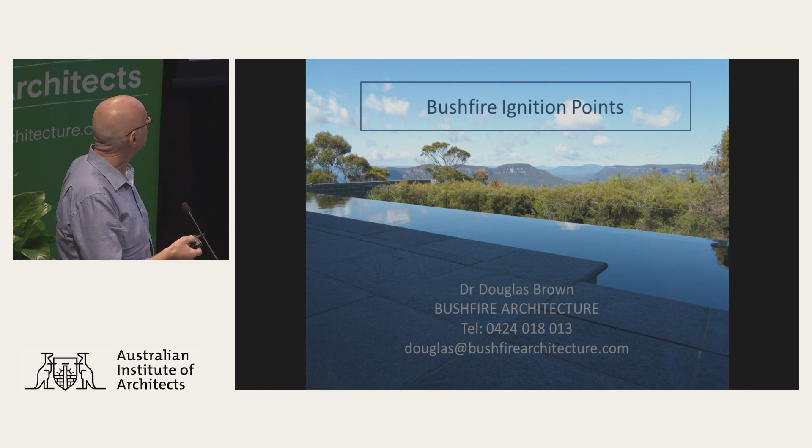Let's start with a bit of quick revision about the conditions necessary for a bushfire: high temperature, low humidity, high wind speed, high fuel load, and then ignition. If you don't have ignition, you don't have a bushfire. If you don't have high wind speeds, you simply have another hot, dry day. It's when you have a hot, dry day with high wind speeds and ignition that we have a bushfire. That's the difficulty of this space, because you can have so many days where the conditions are right, but we don't have ignition.

Now, bushfire research has followed approximately 70 years of research. After major bushfires, there are post-burn evaluations, and as part of those, you look at the damage to structures. Over that period, we've found out which are the weak parts of a building that repeatedly occur. We've had some false alarms — one, which was amusing for a decade, was that if a structure is white, it will not be attacked by a bushfire, because white reflects heat. That one did in fact last for 10 years, but we've got 22 really good outcomes in terms of identifying the repeated weak parts of a structure, which we refer to as building ignition points.

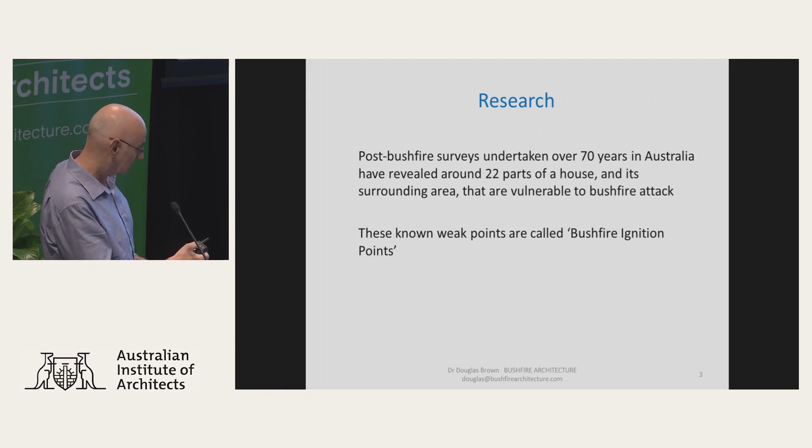So let's have a look at bushfire research. This research has been done by the scientific community, and essentially they've identified the weak points, and we're going to change the construction of buildings and strengthen those weak points so the building as a whole has a greater ability to withstand a bushfire. But architects and our profession have not been absent in this field, though our methodology is different. What the scientific community does is a study, then a scientific paper looking at the results from the bushfire evaluation, and compares those with previous evaluations. That's not the methodology we use in architecture, unfortunately.

But we have done a few things. After the Ash Wednesday bushfires, Boral had a competition — because the fires affected Victoria and also South Australia, they had a $10,000 prize to come up with designs. Then after the 2009 Black Saturday fires, our own institute, the Victorian chapter, in association with the Victorian government, came up with a competition, but you only had about 2 months to come up with a design and there was no prize. That's a very unfair expectation to ask of architects. There are a couple of other articles architects have produced, but generally we have some really creative architects who come up with innovations that aren't necessarily published, so we need to find a way to pull that information together.

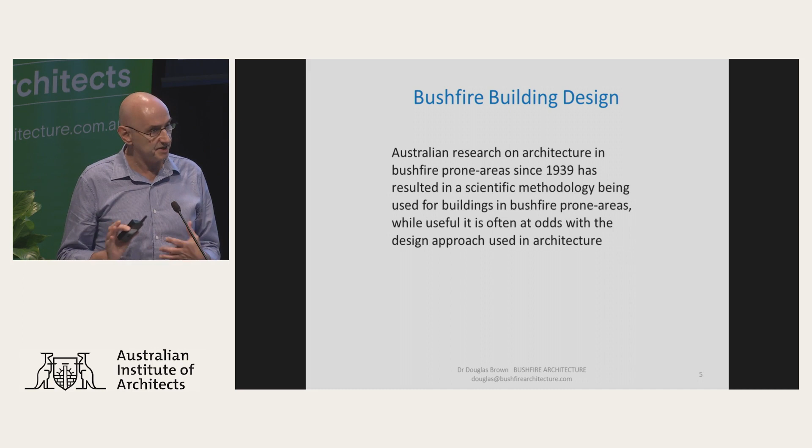So we focused on the scientific methodology, and sometimes that's at odds with design — design is expressed differently to the way we reflect science. I'm going to make a bit of a controversial statement here, which is that most construction materials can be used in bushfire-prone areas, but we have to differentiate between those materials, whether they're used externally or internally. Let me give you an example. I'm going to pick one building material and talk about that in greater depth, and that one's timber. So let's have a look at timber.

8 to 9 of the 22 building ignition points result from the use of timber. You can see what they are here. Timber window and door frames and timber doors are actually part of the structure of the building, but then we have these other components which are either right next to the building or close to it, and all of them create damage.

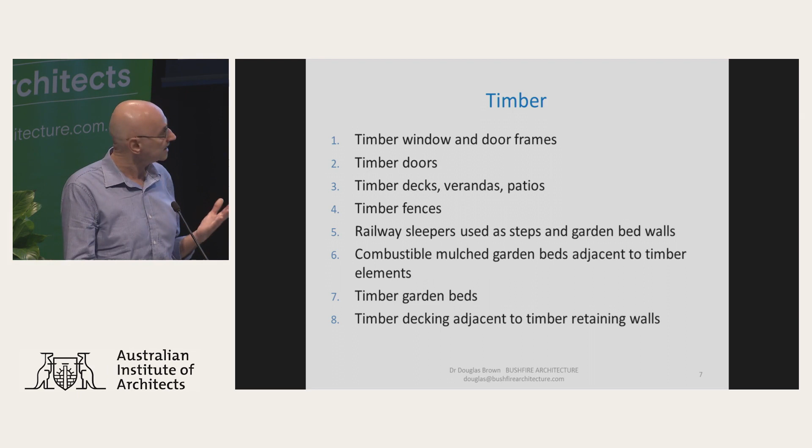We can look at a low maintenance alternative. That goes back to what I said before - if we're designing a structure for 50 years in a bushfire-prone area, we will try to look at low maintenance materials.

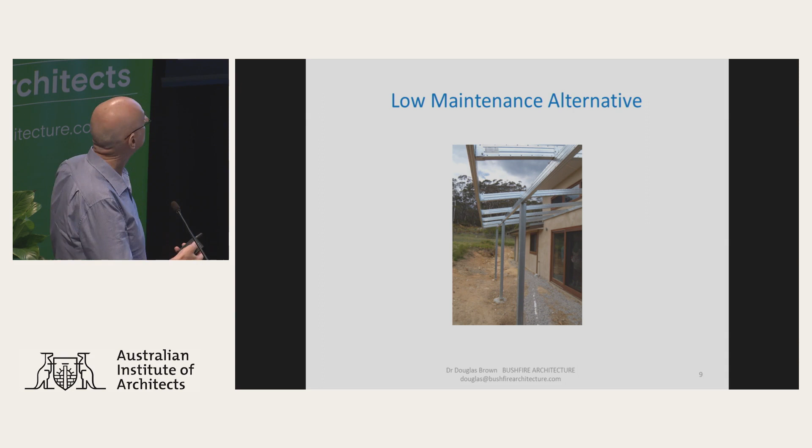Now, some of the structures you'll be redesigning - those people have not just lost their homes, they've lost the contents of their homes. So what you can do now is build in furniture. You can have built-ins, and that way you're using timber while also saving them from having to purchase internal furnishings. The use of built-ins is really useful in terms of creating space.

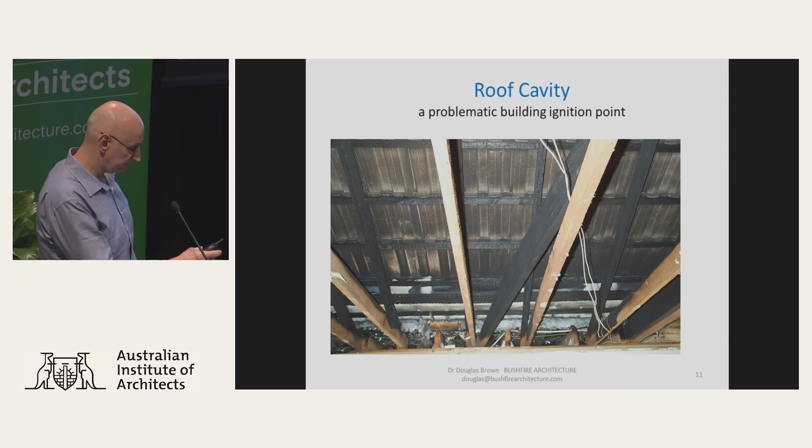Let's have a look at the roof cavity. The roof cavity is one of the most problematic bushfire ignition points, for two main reasons. It's difficult to extinguish - if it's a double-storey structure, you have to get the fire hose into the roof cavity, and it normally doesn't have a window, so it's difficult to actually get the hose in there to put the fire out. Also, when you extinguish the flames, you damage your structure, the electrics, the plasterwork, the furniture. That's counterproductive - you're trying to put out fire, but damaging the structure at the same time.

So let's look at some things we can do. One would be to extend the eaves and collect the rainwater at ground level. Another would be a hybrid solution where you still extend the eaves, but might have gutters on a couple of the elevations directly attached to water tanks. Another option is to have all components constructed of metal.

And finally, the one I'm kind of thinking about now - the big danger of embers getting into the roof cavity is that if residents are taking refuge in a particular part of the house, that part becomes vulnerable if the roof cavity goes up, because embers can spread right throughout the whole house, and the whole structure is potentially compromised. Initially smoke would affect those people in the room, coming through the gap between the ceiling and the roof - potentially toxic smoke - and then later it would develop into flame.

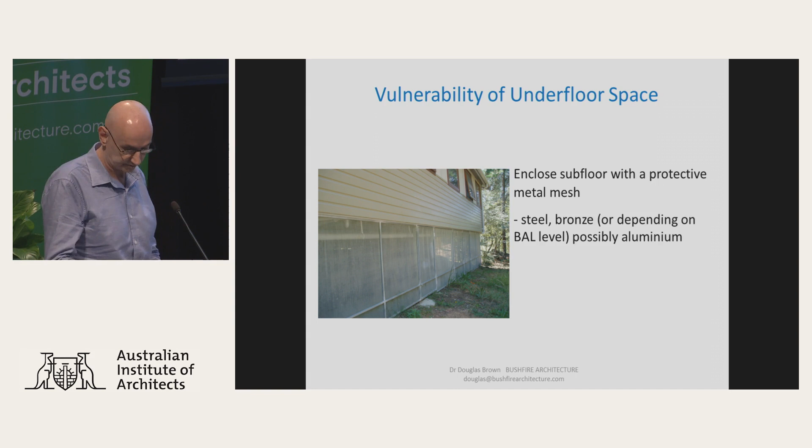Glazing is a big one. I talked earlier about the fact that high wind speeds will really impact upon a large expanse of glass, but so does radiant heat. Radiant heat will cause the glass to crack, and then the high wind speeds will push it in. Sometimes the glass will explode because of both of those combined factors.

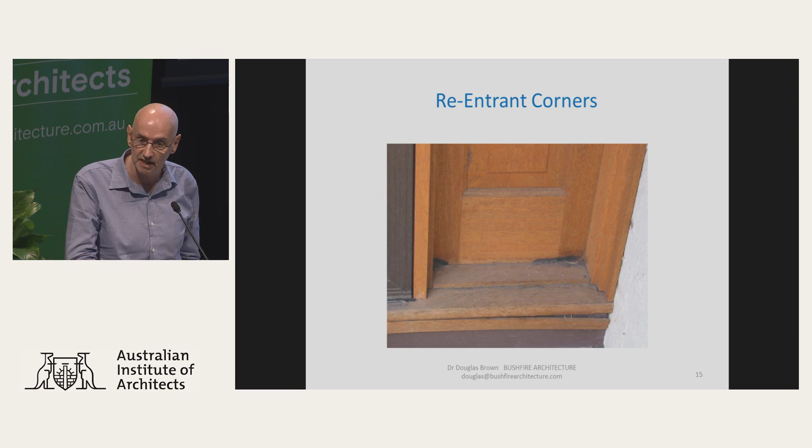Re-entrant corners: what happens is you've got high wind speeds and they will push these small embers collectively into an area. Here you can see where they've been extinguished, but if those ember piles in the corners hadn't been extinguished, they would have flared up and that door would have gone. So re-entrant corners are really important. We need to look at structures which have a simple design and don't have re-entrant corners.

It's not just the house, it's the area around it. Timber fencing and timber retaining walls are also building ignition points. What happens with an older paling fence is it catches alight and it takes a fire right up to the house. And you can see here, we've got retaining walls - what happens with those is they catch alight as well, and depending on how close they are to the house, they can impact on it too.

I've been looking at some of the rebuilding which has been happening in Paradise, California from their fires of 2018, and the first houses have been done, and obviously the cost is more. I read about one family who said, yeah, we built the house to code, but we've got a dog, so we had to put a fence up pretty quickly - a wooden fence all the way around to make sure the dog doesn't get out. So they've actually endangered their house by having that timber fence. Cost is just so important, and the landscaping is so important too.

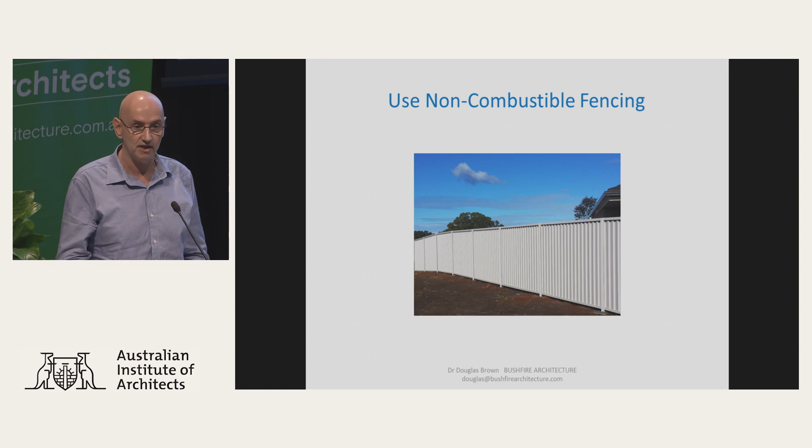So we use a non-combustible fence. You can also get slimline fences that store water, which can potentially be used as bushfire defence as well.

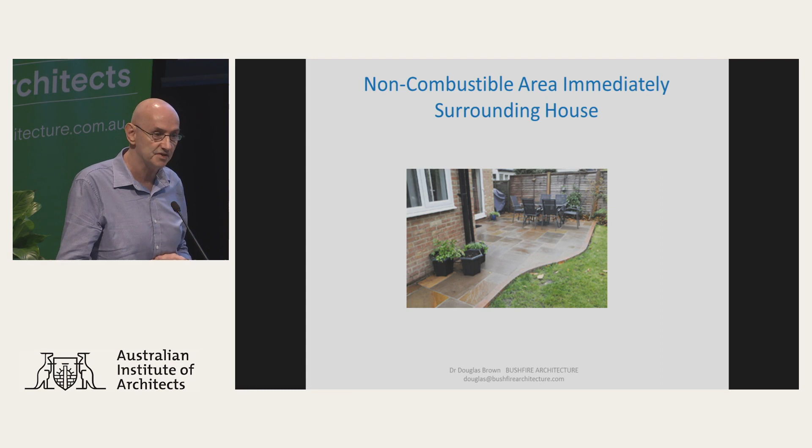I think it's really important to have a non-combustible area around the house. So the idea of having garden beds next to the house has gone - we don't do that anymore. We try to have a non-combustible area so that when embers collect around our house, they're not going to cause it to go up. What they've done here, for example, is use pot plants, which are small - not high dense, not dense plants, maybe just perennials. The other good thing about having this non-combustible area is that when you want to clear out your gutters, you can put the ladder onto a solid surface.

Avoid lightweight second-story extensions. Just avoid them, because unfortunately they're very susceptible to flame. And they often have large amounts of glazing, which is to capture the views, but it does put the house at risk.

Corey mentioned earlier about building-to-building ignition. This is a real issue. Unfortunately, we all want that ocean view or those vistas, and it's at the bottom part of our block that allows us to do that. So everybody builds down there, and when one house goes up, it impacts the others. This was Tathra. We're doing more research about the effect of building-to-building ignition and how we can possibly resite our buildings to minimise that effect.

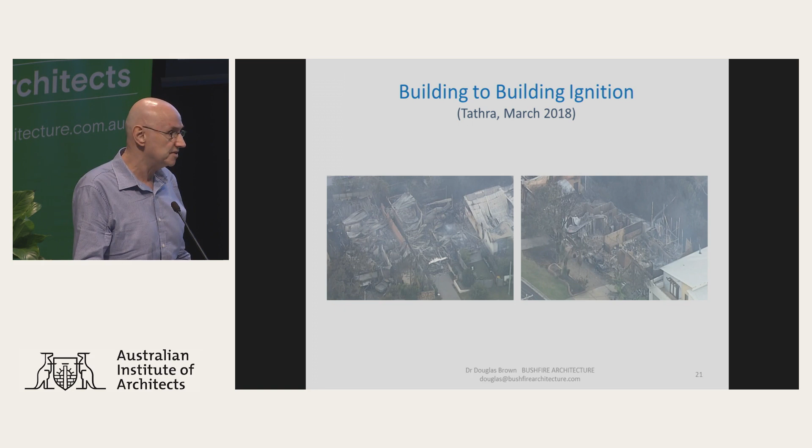One thing we have to do is change our client perceptions. You'll be dealing with clients who are stressed, but it's important to say we need to start thinking differently about how we rebuild in bushfire-prone areas. So rather than focusing on the views and the vistas, you might have to say: the view and the vista is there, you just have to walk out the door and walk maybe 5 metres. So you've got a big task to get them to change their mindset on that.

We have become lazy. We want massive amounts of glazing. We want everything at our footsteps. We just want to walk out of bed in the morning and see this glorious vista. But it comes at a cost in bushfire-prone areas, and that cost can be death. It can be life.

This is probably more the future of what we're going to go for, and it's going to be a bit of a hard sell because people want double stories. But we have become a bit greedy in terms of what we want. So if you're going to reduce cost, you're also probably going to reduce the size of the structure you build.

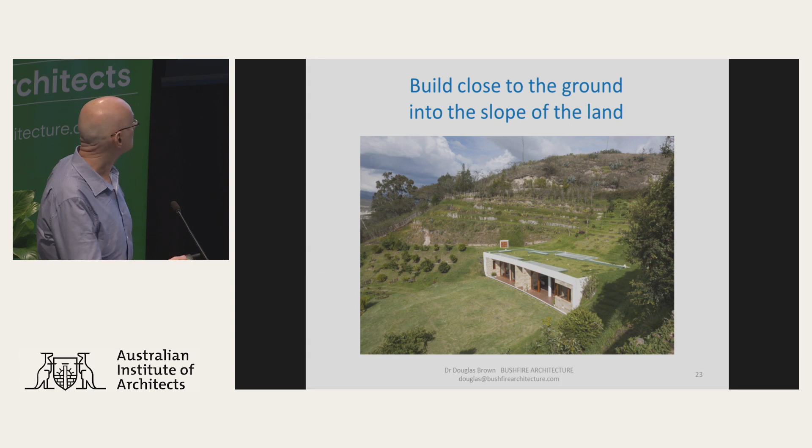So how do we reduce the cost and create more internal space? This is an area where you will really excel, because so far the research has been done on construction materials. It hasn't looked at design. This is where you as architects will really shine, and this is where we need you to step up.

These are just some very basic examples. You're likely to have a smaller floor plan because things are going to cost more. So now we have to make better use of that floor plan, and we do that through good design.

We will use built-ins far more than we have before, because they create internal space. We will use less glazing. We'll still have windows, but you might have to go on site, get a step ladder, step up and say the best vista I can get is 2 metres up, looking at that valley over there, and I'm going to design that window into my structure. So it's windows to capture vistas, to draw your eye out of the smaller space and create the illusion of a larger internal space.

We've become obsessed with black framed windows in this country, and we need to let that go, because unfortunately what a black frame does is stop that transition from inside to outside. I'm sure you all know this, but just in case you don't: your eye looks at the window, sees the frame, pauses, and then goes through. If you've got a light-coloured frame, your eye is drawn straight outside. It's that beautiful, lovely transition, and that's what we'll use to create the illusion of more space when we've got less space.

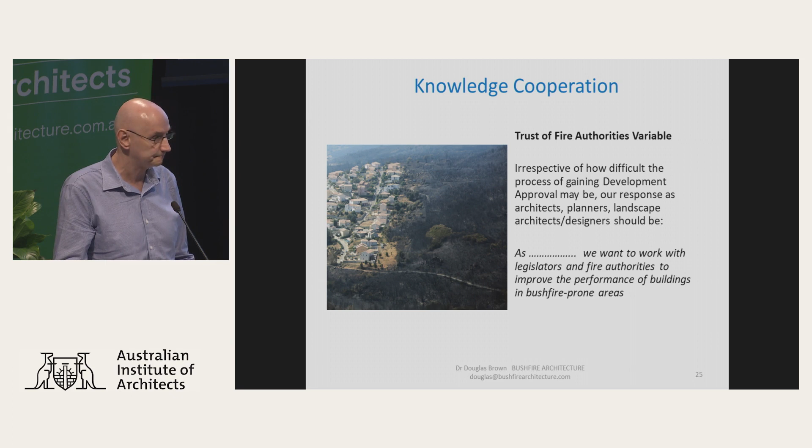Thanks, Douglas, no stranger to a bit of controversy there. And you're going to see it in the next little session. What we have is 6 architects to step up and show their work, or discuss the work of architects. They range from young to old, and we thought we'd put one of the more interesting ones on first.

A young chap called Rory Betts-McRae. Where are you, Rory? Where have you gone? Thank you. Rory's a master's student from the Architecture School at the University of Newcastle, and his family commissioned a house that was designed by Fergus Scott, as I understand it, in a flame zone situation. So Rory's going to talk a little bit - it's probably his first public talk as an architect. Treat him kindly.

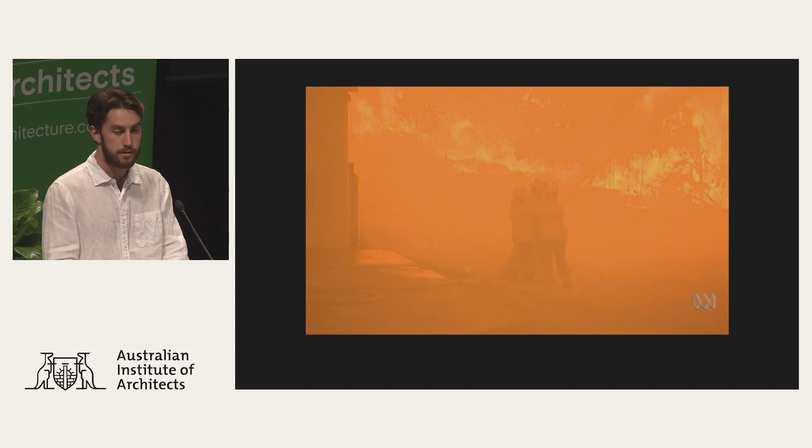Just after 3 p.m. on Thursday the 5th of December, our next door neighbour called. We could hear the fear in her voice. The Currowan fire, which had encircled our villages of Bawley Point and Kioloa, had just crossed and cut off the road access in and out for several days, had just jumped Lake Willinga and was heading towards our properties. It was reported that the flames were 30 metres high and we were in the direct line of the fire.

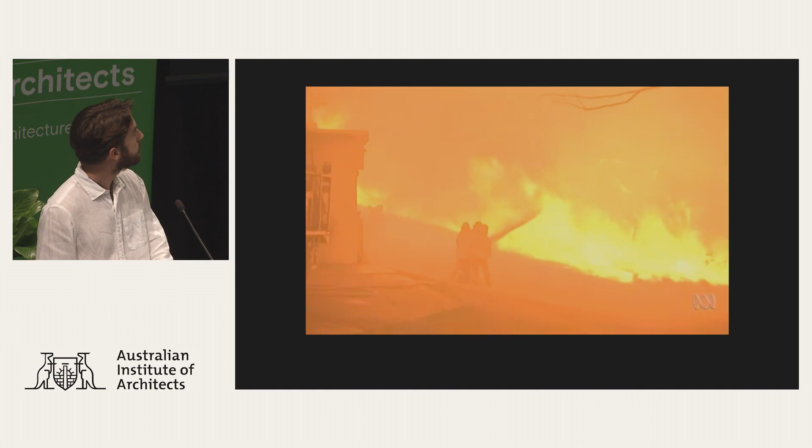8 minutes later, this is what arrived. The footage was shot from the side of our neighbours' homes. The flames you can see across the screen and behind the house are all on our property. There's the fire.

Fergus Scott Architects were commissioned to design our home in 2007. The home was completed in 2009. The site is 5 acres of bushland within 1 kilometre of the beach, set on a hill, with panoramic views of the Southern Ocean, Brush Island, Pigeon House Mountain and surrounding national parks.

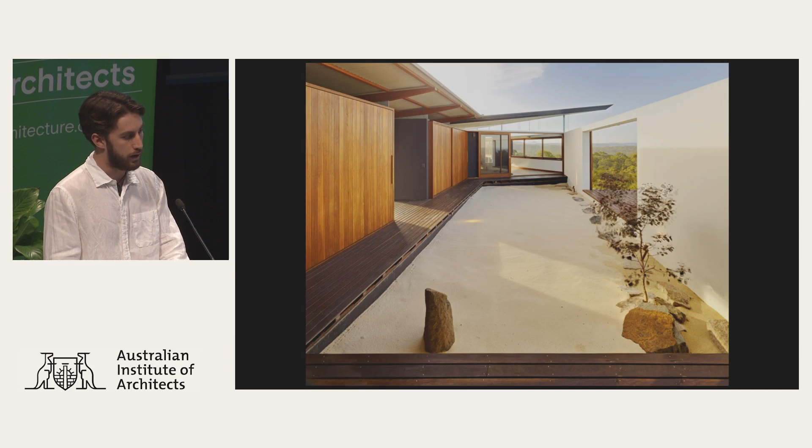In response to the exposed hilltop of the coastal site, Fergus designed a building comprising of 2 pavilions with a central sand garden and a pool terrace within the building footprint. There was a focus on framing the views through the windows and openings of interrupted panorama to connect us with the natural landscape. The design placed the building on the lee side of the hilltop, following the contours of the site. Fergus often referred to the spine of the building as the protective western wall, a considered response to coastal elements, anticipating southerlies and norwesterly winds, with the potential for bushfires as one of the considerations.

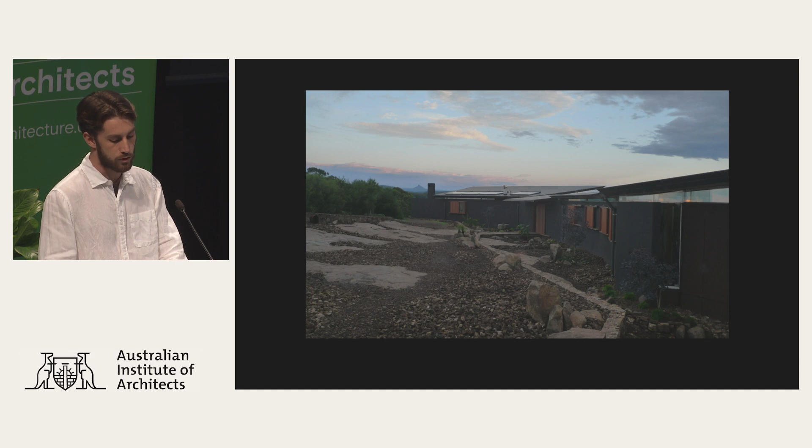You can see the bush that surrounded our site, with our house located just there. And I would ask everyone to please recognise this wall for later in the presentation.

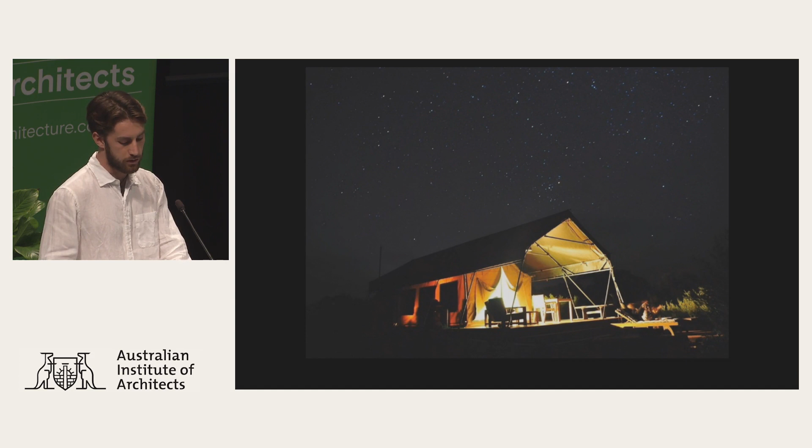We imported an African safari tent to stay on the property during the design and construction stage, which remained as guest accommodation. This was a few hours prior to the evacuation. When this photo was taken, a few hours prior to evacuating, the Currowan fire had burnt 7,000 hectares of bushland.

Just a couple of weeks ago, when it was finally declared out, it had claimed 499,645 hectares. On the afternoon of the 5th of December, a friend told us the fire impacting Bawley was live on Twitter. We immediately recognised the vision on the screen was our place.

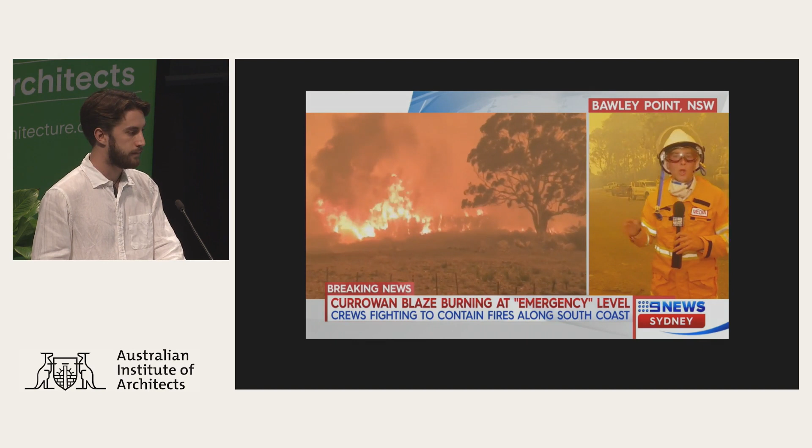Running all around town trying to contain spot fires, which are really being fed by these really powerful winds. They're pushing the fire towards the coast and basically through the heart of Bawley Point. That's our roof.

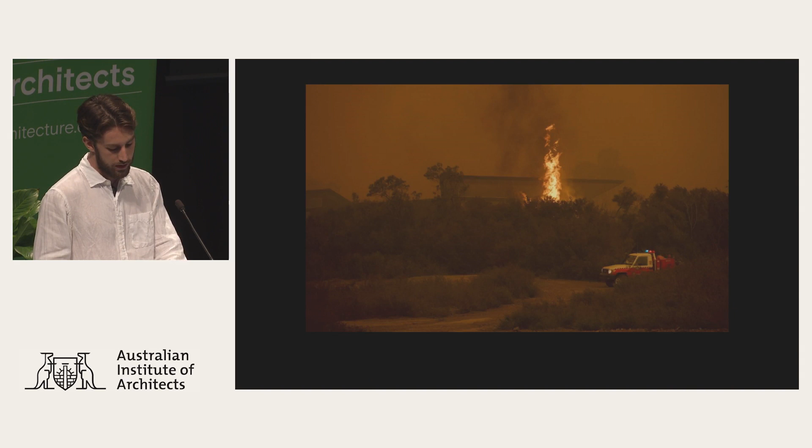The lead fire finger raged directly from the west, with two fire fingers racing up the hill from the northwest. They merged directly behind our place, with the full fire front following. The footage and images show the fire engulfing the properties from all sides. Anyone who witnessed it declared the house was gone. The news reporters describe the house on the hill as either gutted or lost. Both words aptly describe how we felt on the day.

So, if everyone remembers that wall with the opening that I showed you, that's that. Just for a bit of scale.

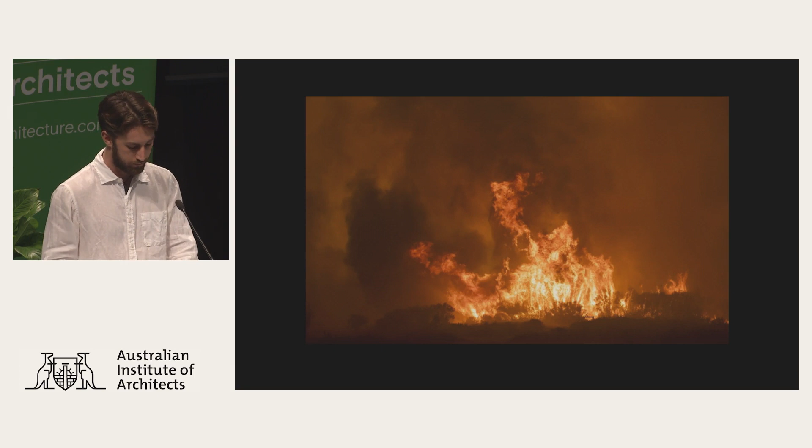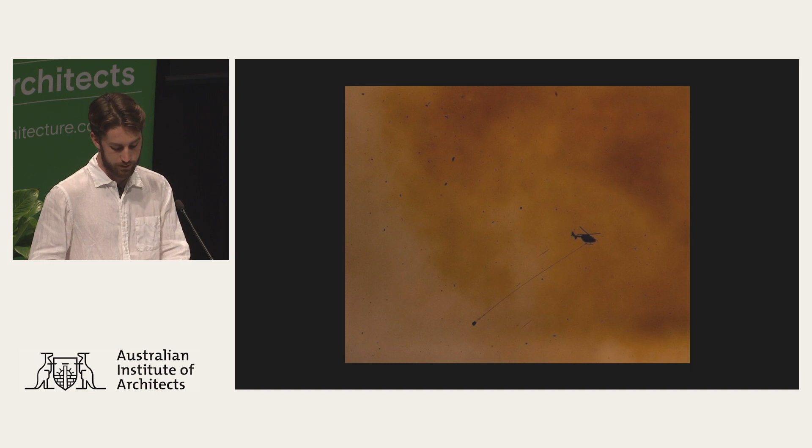We were later told we were lucky that we burnt early in December, as we had resources available then. On New Year's Eve and the following Saturday, many townships didn't. I was personally down on the coast during this time, and we heard multiple stories of people calling 000, asking for emergency help, to which there was a response: there's no one coming, everyone's out. There were simply too many fires to fight.

As it happened, no trucks were on our property, the fire was too ferocious. Two helicopters relentlessly water-bombed ours and neighbouring properties as water was taken directly from the ocean. When we returned by boat, our land was unrecognisable.

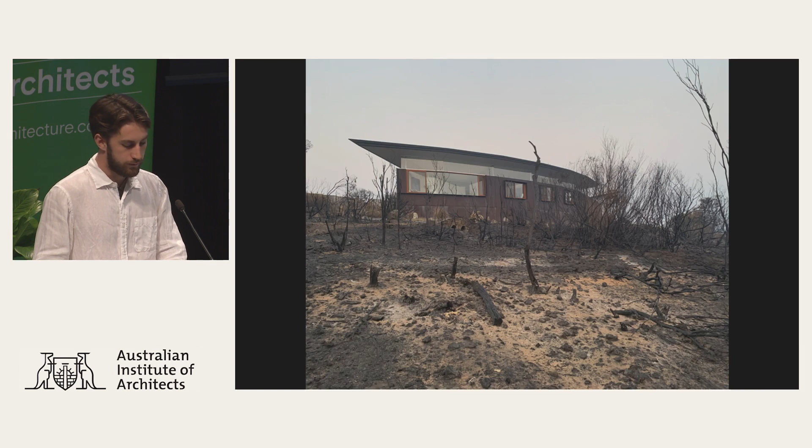Our luxury tent was gone, yet the house was still standing, smouldering but proud. The fire had burnt right up to the steel wall on the ocean side.

Baz, our next door neighbour, had been home recovering from a hip replacement he'd had a week earlier. He left his son to continue putting out spot fires around the house, to trek up rough and still burning ground to put out two fires that had taken hold under the steel wall of the living room with burnt hoses. His selfless act saved our home.

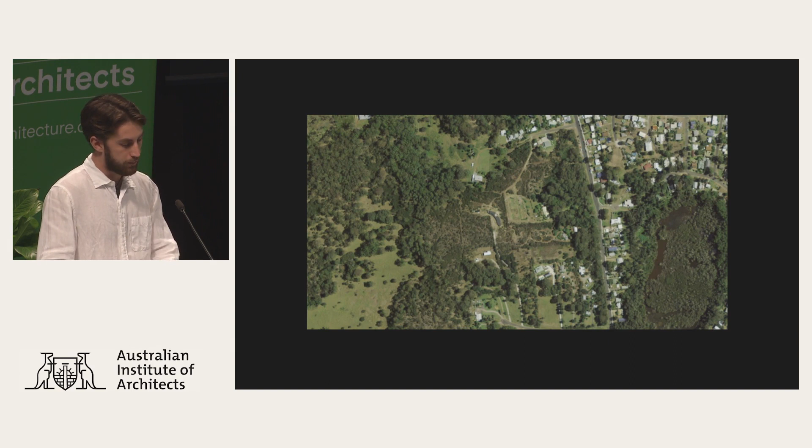As well as the main townships of Bawley Point. This is the radiant heat wall that was required by the DA for any construction to be built on our land, and which we later found out saved not only our house, but also the surrounding towns.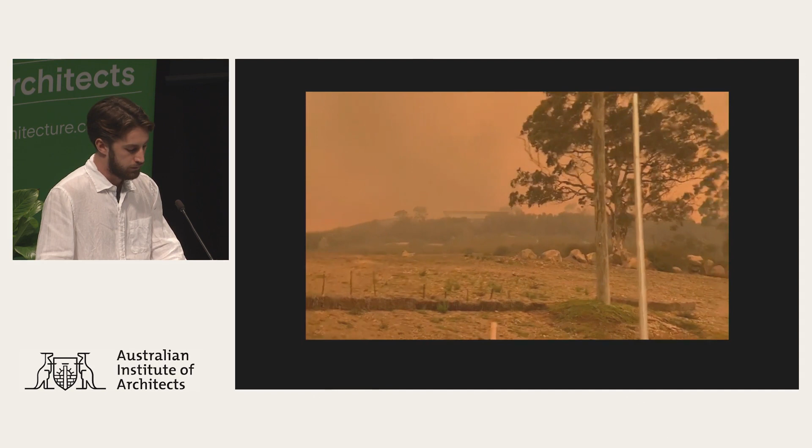To explain how the flame hit, fueled by the radiant heat, combusting to 50-metre flames and fireballs pushing up along the wall, slowly the fire pushing it back onto itself. The intensity of the fire is shown by the apocalyptic scene behind the radiant wall.

So what you can see there is the fire when it first hit at the back of our land, and the radiant heat reflected back off against the radiant heat wall directly behind our house. And that pushes the heat up, and so the flames went from 30 metres to 60 metres high.

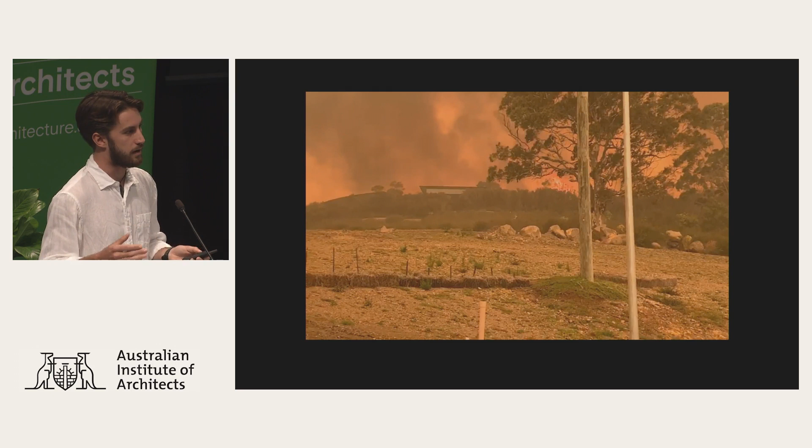This is what was left.

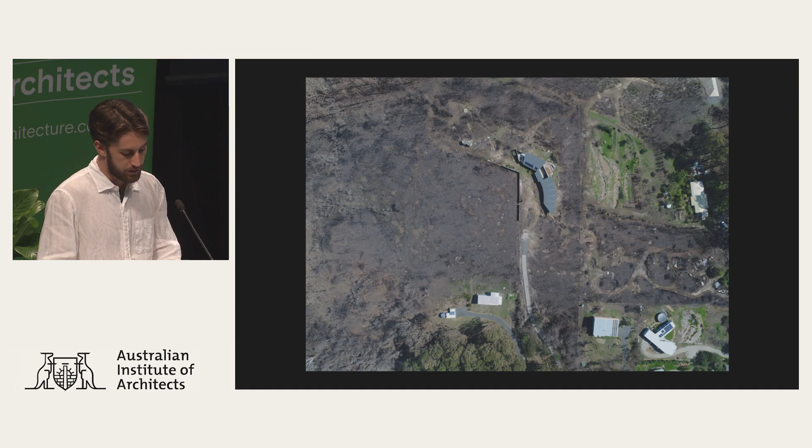Paul Del Mar, a highly respected fire consultant, attended the site after the fires and expressed in his expert opinion that the wall and the house in its design, placement and materials saved the house, and he believes dozens of homes in Bawley Point. Another fire inspector with 30 years of firefighting experience asked to see the house that had been reported lost. Having seen the footage, he couldn't believe that it had survived.

As he circled the house in response to another saying, 'It's a bloody miracle,' he said no. What he was seeing was a design outcome, adding how whoever designs this place, he wanted to meet and shake their hand.

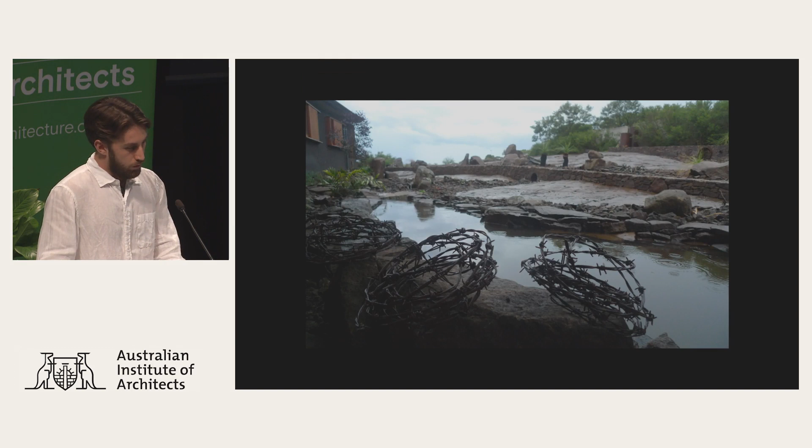So you can see in the landscaping, what we did was expose the rock that was surrounding our site due to a very minimal topsoil found within the site. And what that did was create a fire break, which helped stop the fire. So that's actually the radiant heat wall there that you could see in the previous photos.

We couldn't see it at all. It was completely encircled by bush before the fires. But all this rockscaping between us and the wall meant that the fire couldn't carry directly through to our house. So it slowed the fire down, and it had to encircle a lot of land to get to the front of our house.

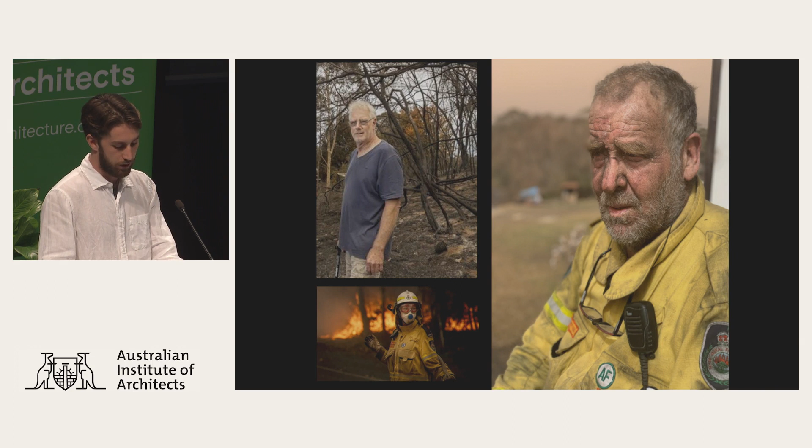I would like to thank Fergus, as well as our neighbour Baz, and our local fireys, who battled every day of the fire for 76 days of the Currowan fire. To Mother Nature for her resilience, and we learnt that you can measure the heat of fire by the height at which the regrowth appears. This tree was 2 metres from the house and is growing out of the roots. Thank you.

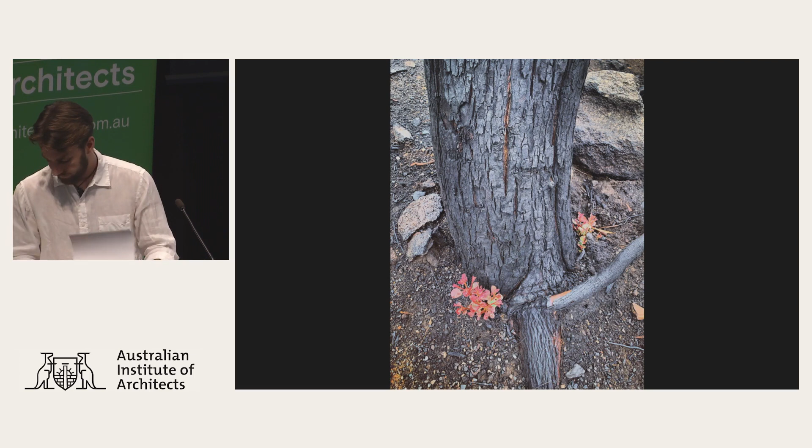Good luck in the Masters, Rory.

You can have a Masters for me in public speaking, and also an incredible explanation of a very beautiful house. Now, the notes say we go from the sublime to the corblimey. Apparently it's me up next, David.

People may know that my practice, Verona Studio, deals in what Americans call poor architecture. We actually do affordable and sustainable housing, and our housing designs are mostly for project homes and what we call concept homes, a small business that does very small, cost-effective homes. It's a way we can satisfy our desire to find a house somewhere between a project home and an architect-designed home.

Now, I was asked by The Drum on the ABC to explain the principles of design for bushfire. So these are some outtakes from that, which I believe will be broadcast sometime next month, probably when the bushfires come back.

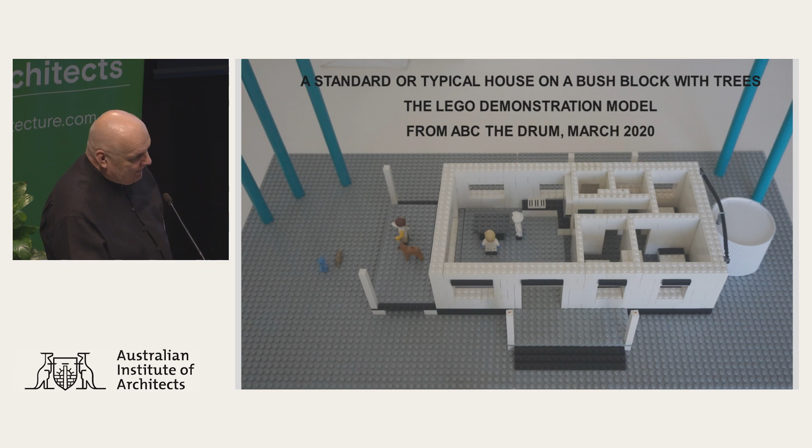So we just took what we said could be a standard 3-bedroom house. It's actually pinched from a manual of standard house designs from the National Capital Development Commission in Canberra, with 3 bedrooms, a bathroom, a laundry, a deck and a sort of welcome porch. The way that would normally be finished would be with a roof like this - traditional pitched frame roof construction.

The problem is, in a bushfire, all the valleys as well as the ridges, but particularly valleys, are weak points for ignition, as Douglas explained, and they are places where leaves collect. It also makes it difficult to clean the roof and do the maintenance that's been talked about.

I should also explain the idea here is a single-storey house, and for demonstration purposes the black bit underneath suggests it could be built up off the ground, but it would be better if it was a slab on the ground.

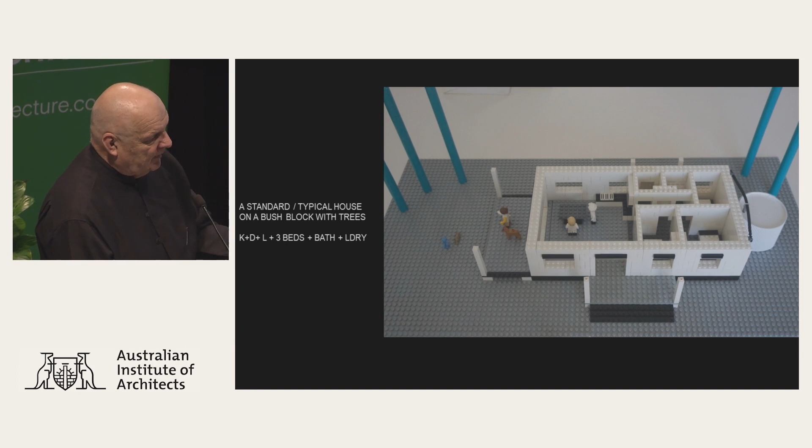So we talked about that roof, and then we suggested in this video piece that maybe a simpler roof which drained down to gutters on just two sides, rather than all the way around, would be easier to maintain, easier to have leaf guard, and have less crevices where embers could attack or set fire to leaves. We were architects, so we actually put a rolled roof, a curved corrugated top to it - I was a student of Glenn Murcutt's after all.

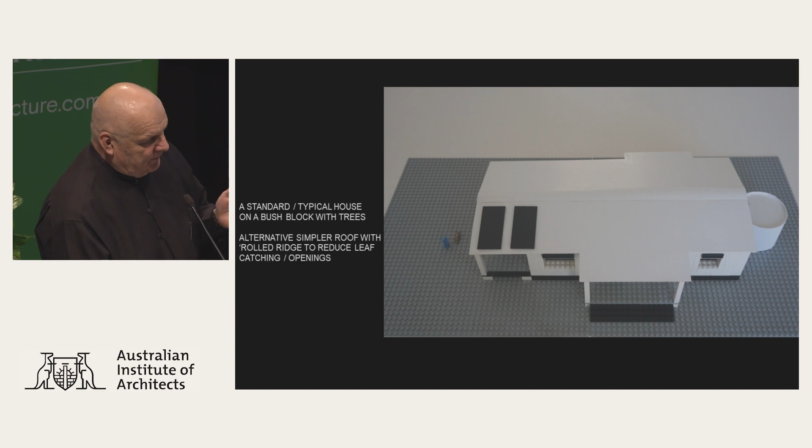So we then looked at what would happen if the roof had sprinklers on the ridge and all the way around the edges, and explained the methodology of wetting the building, wetting the roof and wetting the areas where ember attack is most likely to come in - underneath the eaves, at the eaves, through windows, and of course underneath the floor, which gets enclosed.

We then looked at the notion of having a water tank - since the code, which we'll talk about after the afternoon break, requires about 1,000 litres a minute, and you need at least an hour's worth, you might need a 60,000-litre tank, which is what we modelled there. You'd need that water also to go to a pump and a gun.

Believe it or not, Lego, my great friend Lego, actually have a water pump to put in the model, as well as a good dog.

Then the next thing we looked at was, would you have a bushfire shelter? Once you've protected the building, you'll notice what's happened now is there's a gauze-in area around the open deck, so that at times when the bushfires are there, we can actually trickle water down that gauze - could be bronze, steel, aluminium, if it's not in the flame zone.

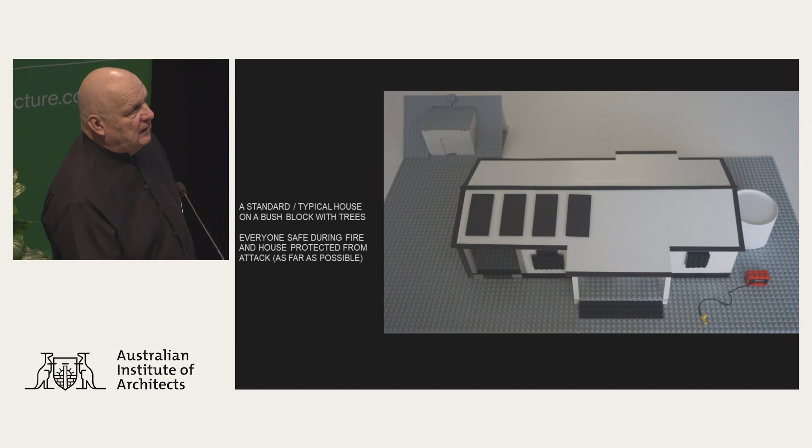The people and their favourite pets and any animals go into the fire shelter and shut the door, and they're safe. As was said earlier, 15 to 20 minutes is the time scale of the intense fire front coming across, with the radiant heat and so on, as Douglas talked about. Once that's happened, you can exit and go back to putting out spot fires and putting out the embers.

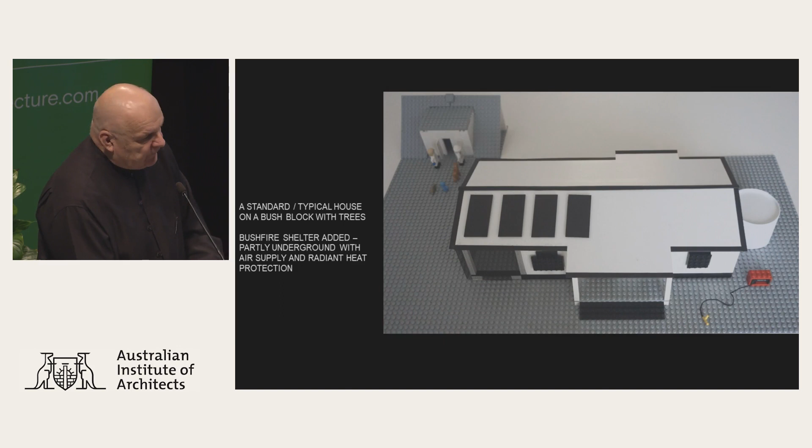So those were our principles. What does it look like in reality?

This is a low-cost home, for a couple in their first home on a piece of land their family had owned but never developed because it's right at the edge of the bushland in North Epping. It's a house design that we cost at $250,000 construction cost, but it came to $340,000 with all the flame zone add-ons, as well as some additional things the clients wanted, like a much larger deck area.

Essentially it was intended, as part of our research into making buildings cheaper, as two modules built as portable modules made in prefab, which is one of my passions. However, it's still not possible to get prefab homes built at a cost point where they have both the high quality you can get out of prefab and the lower cost.

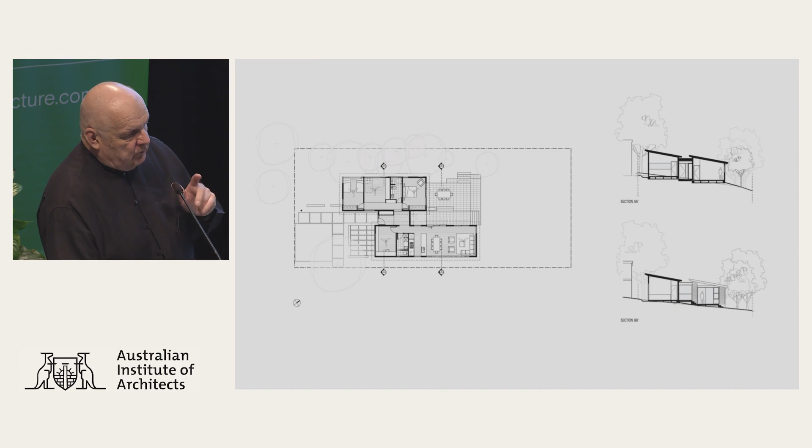Hence the roof forms are designed to be able to get underneath bridges and so on, for transport from remote locations. Had it gone ahead, this would have been made by a firm called Modulan, based in Brisbane.

However, it was custom made, with some things such as the sliding shutters over the exposed windows, made from compressed fibro cement sheet hung on rollers inside an aluminium frame, which then rolls out over the window.

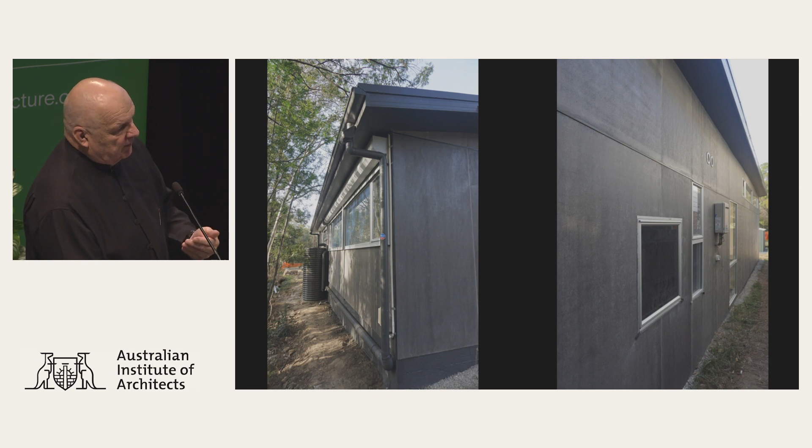There are screens over some of the windows which are not directly in the flame zone, made of Crimsafe, a material you'll be familiar with, or on the left-hand side you'll see shutters which roll down over the windows. The house itself is entered on the left-hand side.

These photographs were taken just before occupation, so the landscaping, done by the owners, isn't finished. You walk inside, and then you can see out onto that deck, with a pool of water meant to be sitting in between the two, and then out into the terrace area at the back.

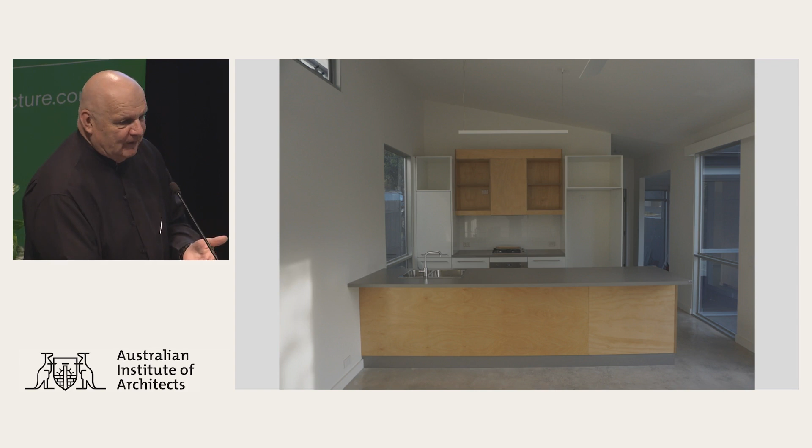The internal parts were made from timber and plywood, one of my favourite pieces of it, in accordance with what you had just said. So that, if you like, is a way of building on what is a very, very beautiful piece of land, but highly under threat, trying to apply those principles to get a flame zone house constructed.

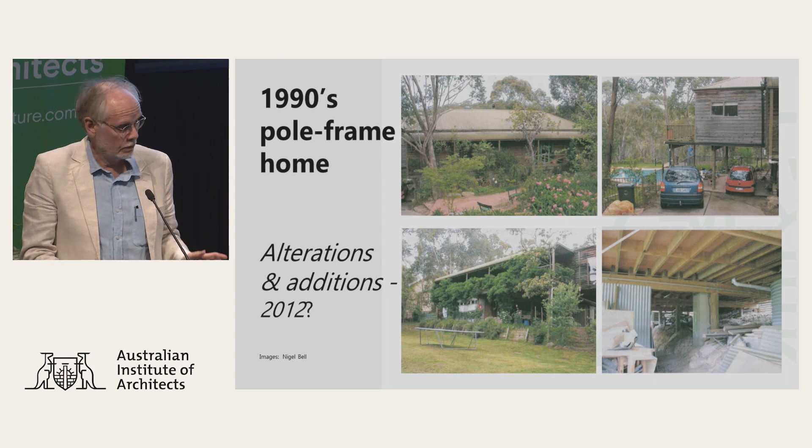So I was called in 2012. Their kids were coming up to teenage years, and they wanted to fill in down below so they could gain extra space. This was a couple, probably in their early 30s, in their first home. What was cheapest on the market? Well, a very difficult block of land, and a cheap project home of the time. It had everything wrong.

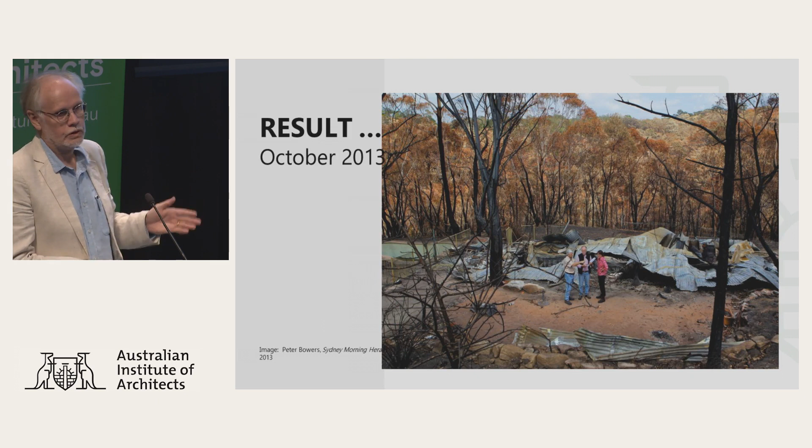That remained. What a surprise. The swimming pool remained, so it was how to get a house in there. We put forward the design, and it became a thicker house because we were trying to get sun and ventilation in back rooms, as we all do as architects.

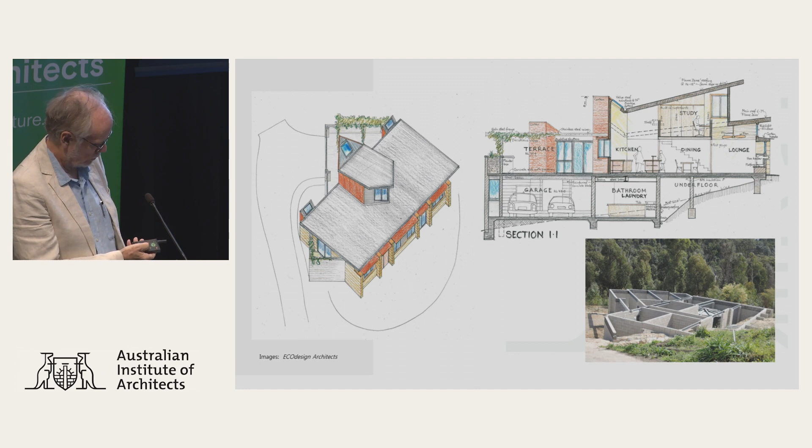Otherwise, everything was up here, which I designed as single story within the courtyard terrace because they're well above natural ground. A late addition was to add a study up in the roof, designed deliberately to try not to be a blockage or a dam for embers and for severe bushfire events. Problem was, here we've got a Velux, a Velux, and a Velux.

I nearly always put them in. I believe in natural light and ventilation in back rooms. Why, in the brightest, sunniest country in the world, with one of the most temperate climates, aren't we using that as an everyday norm? But BAL-40, yes.

Rebuilding, flame zone. A year of discussion, argument, backward and forwards, technical research. No, you can't do it. They wouldn't refuse it, but they wouldn't approve it. In a year, no precedent. My client is well known, didn't want to take it to court. Unfortunately, it'll take something like a court case to be able to sometimes wedge or lever change.

Under construction of the rebuild, it was pretty standard timber frame. Anything going through obviously had to be metal, everything had to be sealed, no gaps more than 2 millimetres. You can see from the driveway, that original driveway, and then that became the garage. Then we've got the house proper, which is relatively elevated purely because the land falls so quickly.

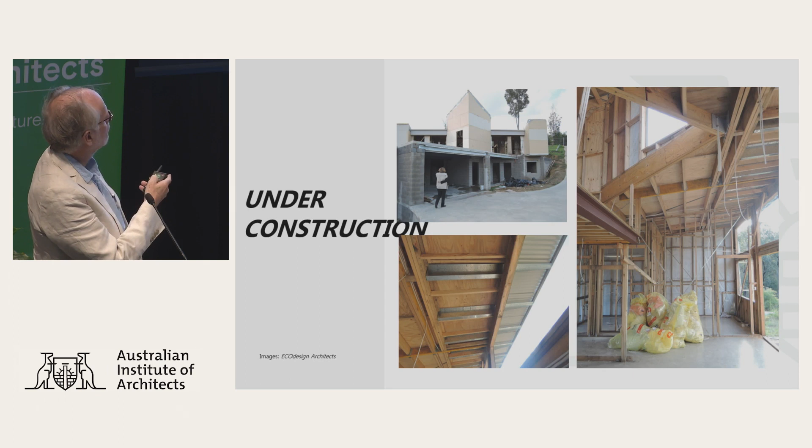The cladding on the outside became magnesium oxide board, and that was added because we used timbercrete, which had been tested to 190 millimetre thick, having an FRL of 240, 240, 240 — 4 hours fire protection. Not good enough in a 70 mil when compounded with expanded polystyrene on the inside. Not accepted because the thinner version had not been individually fire tested. So we ended up spending another 20 grand having to use what meets the fire test and then overclad it at additional cost.

So you can see we used these timbercrete panels over the fire resistant layer. Everything below is blockwork, concrete and the like. Corten used on various walls, and where you have awkward windows that you can't put shutters on, we actually have a Corten swing shutter that faces the neighbour, so it's not really the most fire prone, but we hope it would be closed at the right time.

Otherwise, the great frustration was we're not allowed to put in Veluxes. So I said, okay, test it to BAL-40. We went through the number crunching. No, won't accept it. Okay, what about Velux with CrimSafe over the top? That reduces radiant heat 47%. No, won't accept it. Oh, well, you'll accept windows in a wall with an aluminium shutter — this is 4 or 5 years ago — we'll do that above this. No, we won't accept it.

Without a court case, what do you do? Or you hope logic carries through. So the house is now built. It's got those flipped-up roofs with only short triple-sized box gutters, and maybe one day a Velux might magically appear. But in the meantime, we had to do stupid things like put a vent directly facing the radiant heat in the fire front. Silly.

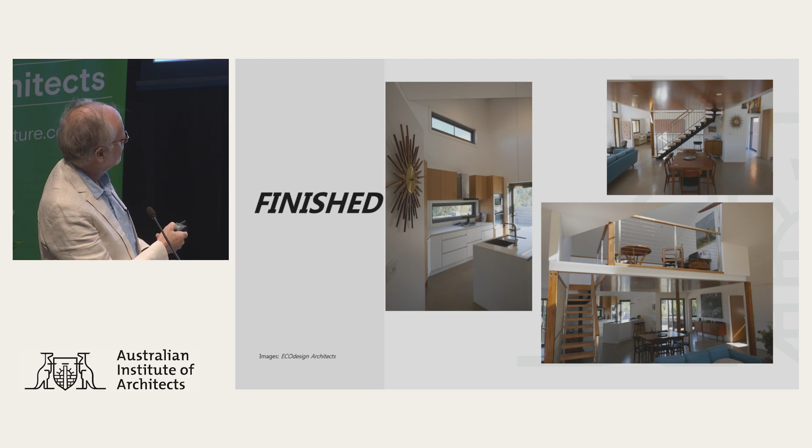Inside it's very pleasant, obviously with good natural light now coming from above. That becomes the office way up there. It was to be a relatively modest house because, like most people, when they came to rebuilding, it was going to cost hundreds of thousands more than where they started from, and they too were underinsured. We can talk more about that later.

Anyway, in the end, they lost, as people do in bushfires, everything. They had a fantastic art collection of Aboriginal art and all sorts of things, and all the family memorabilia. They even asked me for photographs of the original house. They had nothing, so everyone has to start again.

But that's where you and I will be listening in to that future AIA presentation, in a month's time, about rebuilding after bushfires. Thank you.

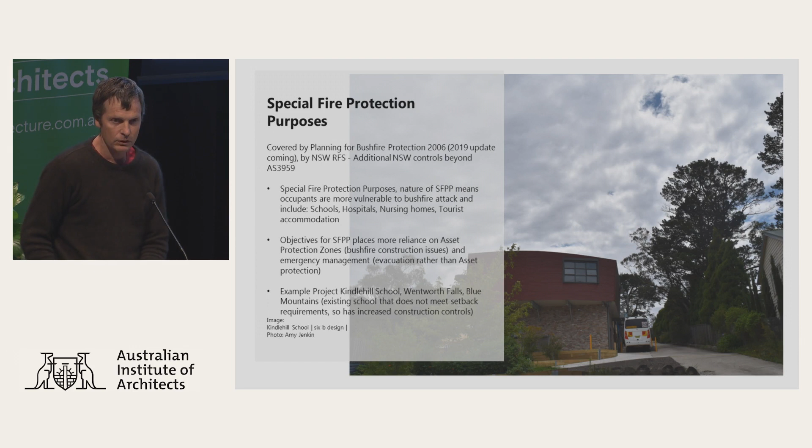This school doesn't meet the setback requirements, so it has increased construction controls. This is just part of a plan.

One of the conflicts with schools is the school has to be accessible, meaning the accessible path of travel can only have a level change of 5 mil. But a bushfire door needs a seal that's more like 30 mil, so you can close the door and stop embers coming in, and it closes against the seals. So you have to come up with a solution that meets almost every individual door.

In this example, option 1 shows the doors that are more exposed to the bushfire, so they're bushfire doors that meet the standards. Option 2—with a commercial building or school you need two fire exits from each room or each level, so you can look at different doors for different purposes. Option 2 is an accessible door but doesn't fully meet bushfire controls.

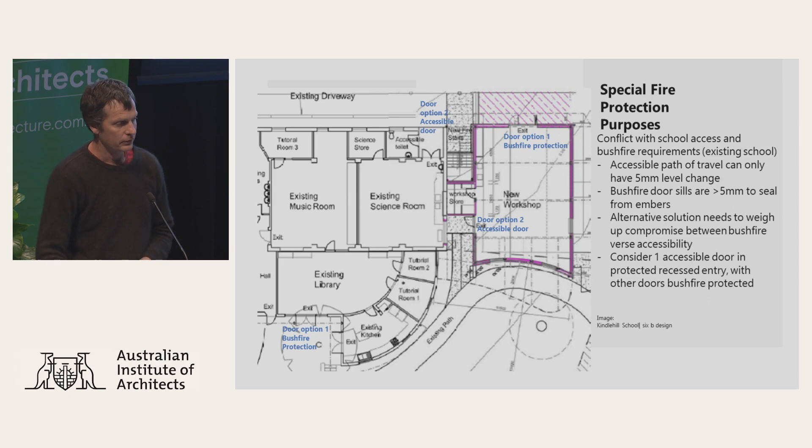We located them in a recess in the building away from the bushfire threat. On this site, the bushfire threat was coming from just one side, so you can orientate some doors away from that threat. But it doesn't comply with either code, the BCA or bushfire.

So these are the two examples. The top one shows a bushfire door that has the seal and the door closes to it. There's a door ramp on the inside. This was a renovation to an existing room, so we had all kinds of other issues.

Option 2 shows an accessible door that doesn't comply with bushfire. It complies in every other way—seals around the sides, the top. It's just the bottom sill that doesn't comply. The glass complies, the frame complies.

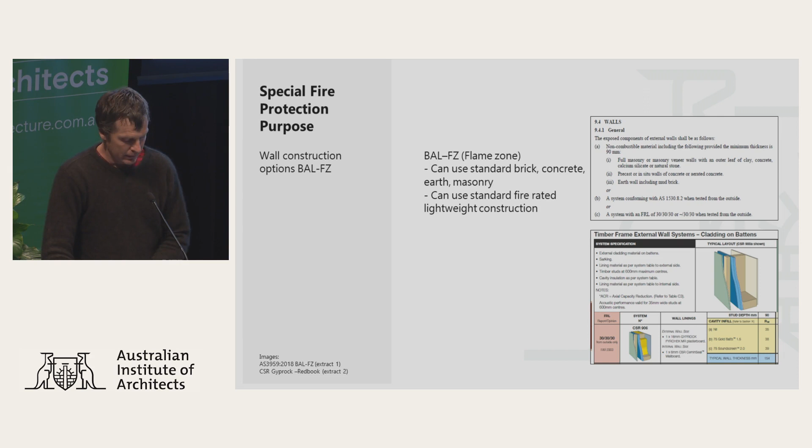I just want to quickly go over the flame zone construction for this project. The top extract is from the Australian Standard—basically you can use 90mm masonry for flame zone, or a system with an FRL of 30-30-30. The bottom extract is a CSR standard 30-30-30 FRL construction using a standard stud wall, 16mm fibrous cement, fire check, sarking, a batten, and then cladding. So you can use standard construction for flame zone—there are many other manufacturers with similar construction.

This is a lime rendered wall over a straw wall at the school. We used a 90mm render over that straw lime render. At the bottom of the wall there's a 90mm angle, and around the window there's a 90mm angle. The main reason to do that is so we could show it complied during construction and sign off at the end, because 90mm renders fairly thick. It also gives you a place to attach bushfire shutters to, because the lime render's soft and not structural.

This is a recent extension that's just been completed. It uses more conventional materials: recycled bricks, more than 90mm thick, 110 thick, and cladding over stud walls with fire check battens and metal cladding.

The FRL standards mention you can have any cladding, but the RFS says the cladding can't be combustible. So some people put a timber cladding on it and it doesn't comply with the RFS. You can also see on this window there's the window surrounds built out to hide bushfire shutters.

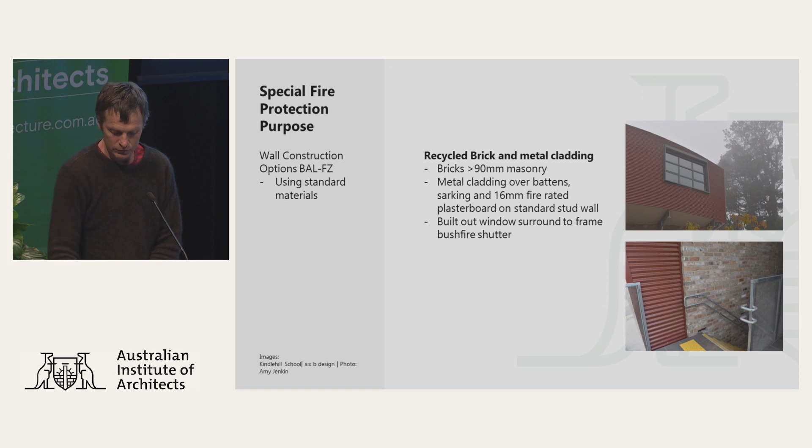So I just wanted to touch on a few commercial building conflicts with bushfire control. For an existing building there are many conflicts, and the RFS Planning for Bushfire Protection sets out the objectives which help you work through those conflicts and come up with a solution with the PCA. Thank you.

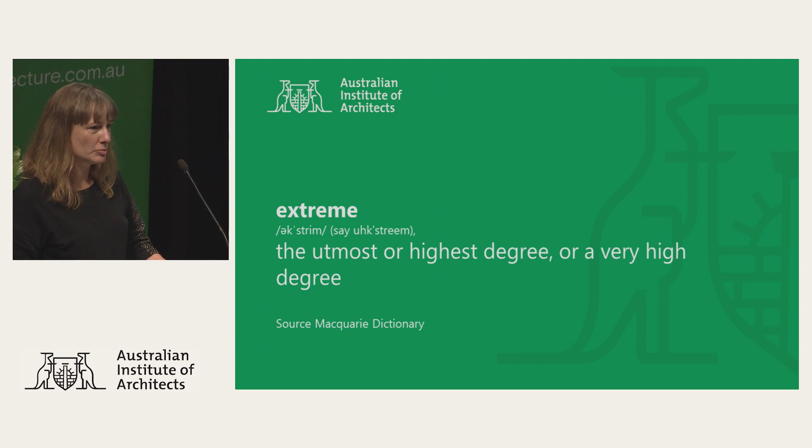Thank you. I took the emphasis for this talk on the word extreme, because we're building in extreme environments.

The other aspect to this project is that it was an owner-builder for a BAL-FZ house, which is an interesting undertaking by itself, but he'd already built a boat and a canoe, so he was sure he could build a flame zone house.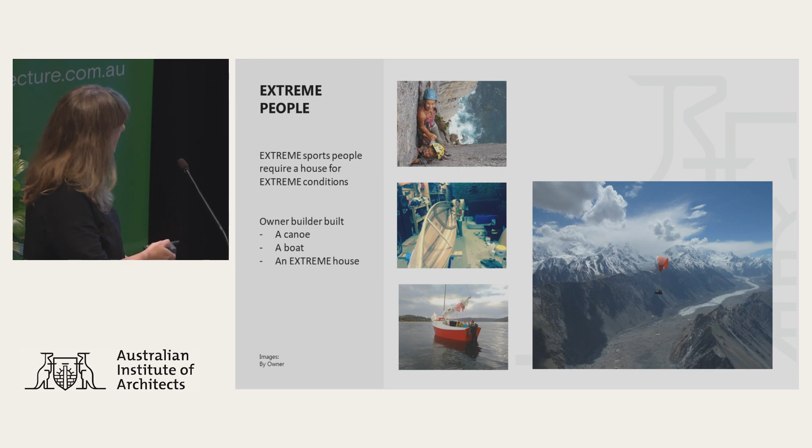This is their existing house, or was their existing house. It was quite an extreme existence. They decided to rebuild once they could feel the rain coming in through the cracks in the glass in the windows.

It's also an extremely isolated property. Hang on, how to go back. This is the house here. There's a large cleared area, which is pretty much the boundaries of the property, going to the road here, up the side here, and to the back of a natural water pool.

There's an existing garage, which actually occupies just a climbing wall. There's a 100,000 litre tank here, and we built a 20,000 litre water tank here, as well as a natural water pool, to provide enough water in the event of a bushfire, because there is no town water here, and there probably won't be a truck turn up.

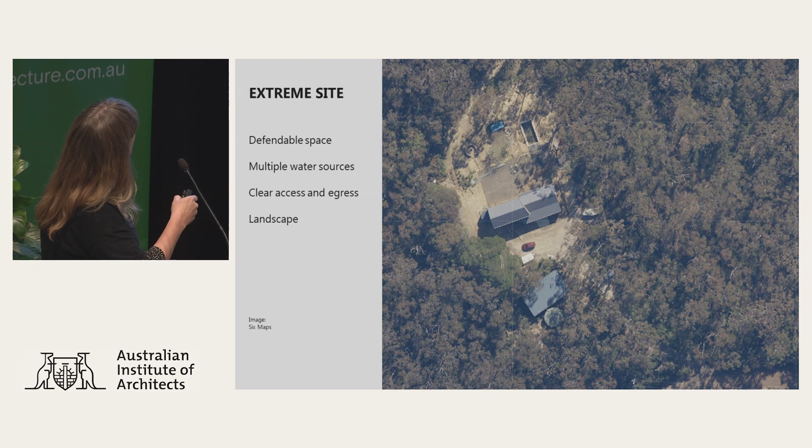The other important thing is that the access is a direct line of sight from the driveway, so it's very clear if a truck were to come, where it goes and where the water tanks are. The house is also basically a rectangular shape, so that in the event of a fire, people can navigate around the house without having to go through complex geometries in and out of corners to get around to put out those embers. And the other notable thing is there's very much a clear landscape around the house.

In terms of flame zone materials, I just thought I'd point out, because it was an owner-builder, it had to be quite a simple construction. So what we did was we used two main products.

One is this Promatect board, which basically fire rates the same as the 16mm fire check. The other product is this sort of cement sheet looking product here and here, which is a 16mm board called Inex board, and it's rated to flame zone.

The client wanted a variety of roof forms and materials. So again, it's not about building a bunker in the ground. This is these people's homes, so I wanted to design something reflective of what they wanted but still complied with all the bushfire regulations.

The other thing to note is that the standard has a detail for eaves design showing a double batten with fire resistant insulation, and that's what this extra insulation along the edge of the roof is. There's also brickwork, which you'll see in the next slide.

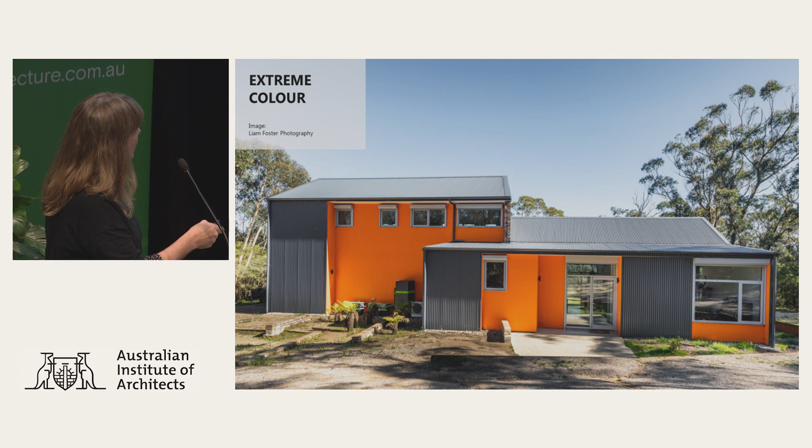Again, simple gable roof forms, double story to capture the view, even though I know a few people have said not to do that today. Brickwork again. There are a few in and outs, but it's basically a rectangle in plan.

This house was approved prior to the changes in the window Australian standards at the end of 2017. So it's a combination of BAL-40 windows with aluminium shutters over, using light coloured windows so that you capture the views.

It was a requirement for the client. Her study is here, and she wanted to be able to see people coming up the driveway through that window.

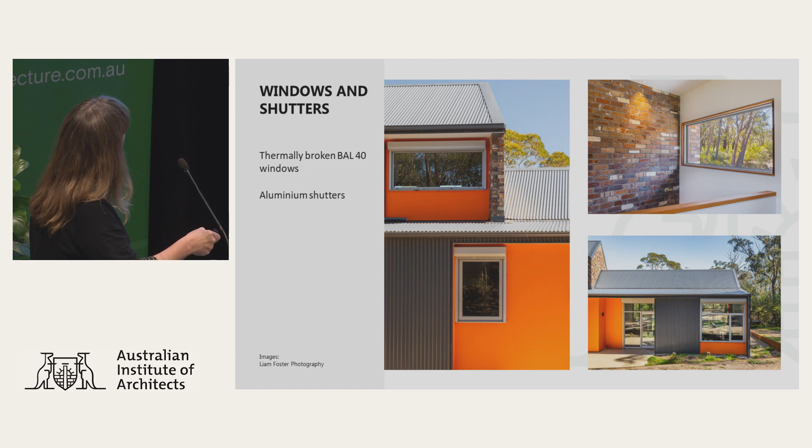The other thing is it's also extreme climate because there's also snow in the area, so building for both bushfire and snow climate is quite a challenge. I just wanted to finish with a bit of extreme sport.

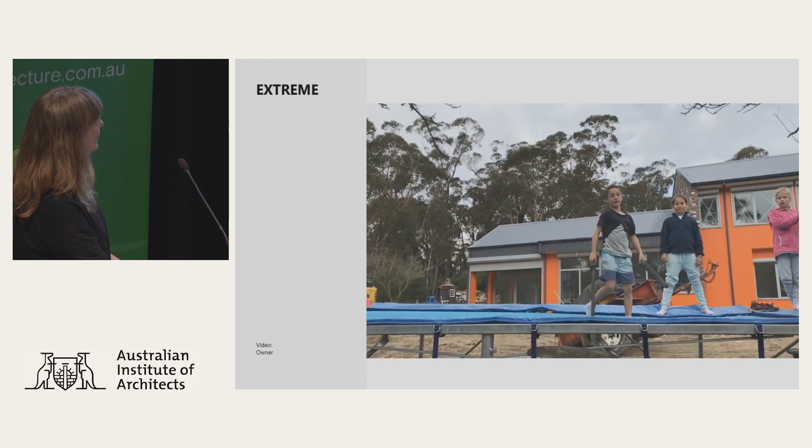That's great, Ingrid. I think you've beautifully interpreted the rather simple things I was putting into my Lego model, because the finest ideas you have at Lego always get compromised when they meet humans. And please take this the right way, but one of my favourite sayings is that every great battle plan fails on meeting the enemy. So it is with design.

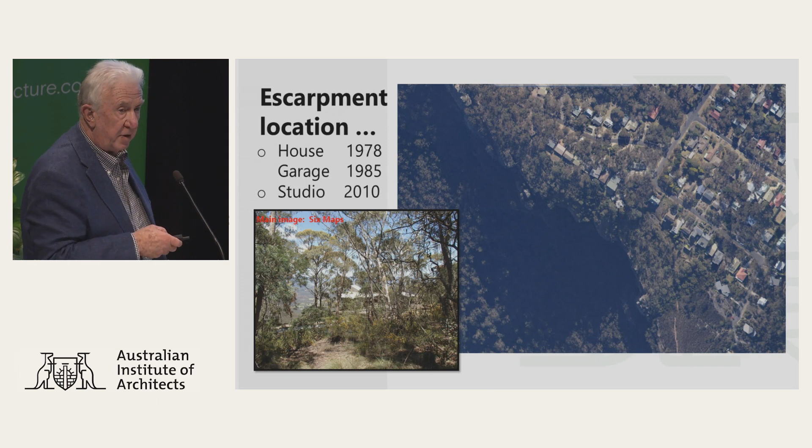There's the house on the landscape. This is an escarpment here. It's at Mount Victoria, and at that point - that's right, is it Nigel? - that's where the house is. When I found this block of land, there wasn't another house in all that area. It was total wilderness, and I decided to build myself a house.

This was in 1971, after I purchased the land, and it was completed in 1978 because I built it on weekends myself, and that was the house I lived in. But in 1985, or thereabouts, I built a studio. The studio is further up the block and much more accessible. It was actually a garage, not really a studio to be honest, but a garage.

And, change this - there it is. The garage was later converted into a studio, and later into a studio dwelling, if you could put it that way.

The garage is ostensibly made from steel. I was very, very conscious to make it bushfire resistant, without knowing anything about the BAL system, without knowing anything about how you go about doing it in a formal way, in a technical way. I designed a building which I thought would be resistant to bushfires.

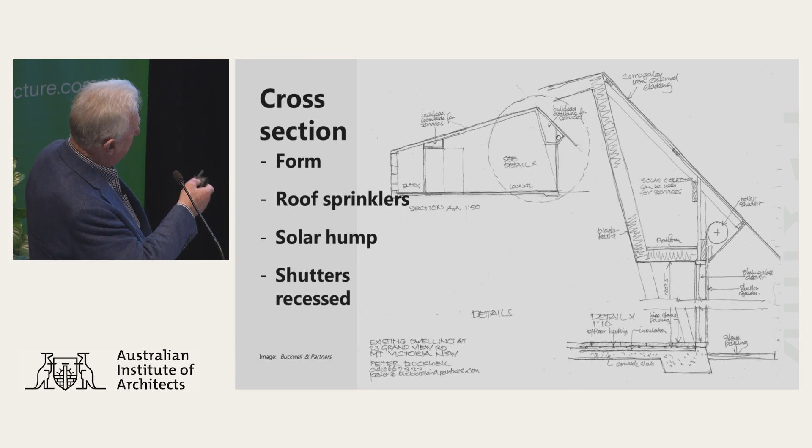That's a bit of the detail of a solar hump. I'll go forward a bit, and you see up there is a dam. The dam is on the site, put in when I built the original house, and the aim was to charge the sprinkler system in the event that the water supply had failed. It was never ever used for that, and when I built the garage and the subsequent studio, I still incorporated the sprinkler system on the roof.

Now let me tell you a little bit about sprinkler systems. I started the original house in about 1971. Just prior to that, there were some major fires in Victoria, I think they were called the Ash Wednesday fires, I'm not sure. But it came to my notice that there were 6 buildings that survived those fires, and those 6 buildings had sprinkler systems on them. And I thought, well, this is for me. I'm going to put a sprinkler system on them.

I have to tell you, if you've never experienced it, sprinkler systems are incredibly effective. In no less than 15 minutes on a very hot day with little humidity, you put that sprinkler system on and it will deluge the house. The original house has no eaves, and it's designed like a full square so that you can get an even amount of water on all sides of the building, and it provides a curtain of water around the building. I've incorporated that in this building as well.

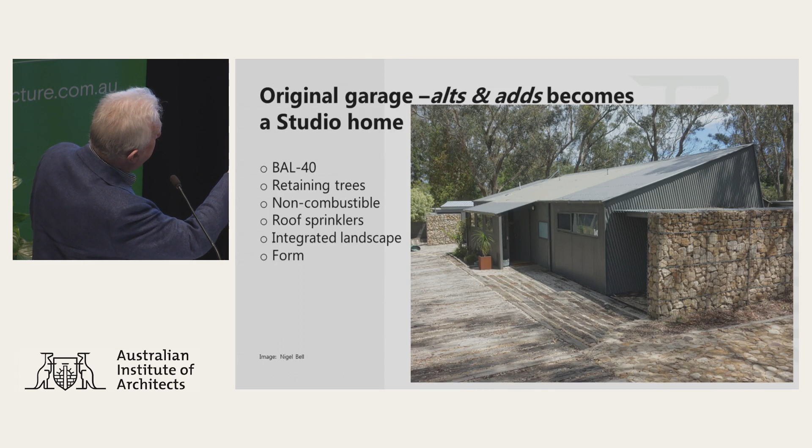I'll see if I can go back. Okay, I don't know whether you can see it, but just there and just there are the sprinklers. They're just simple agricultural sprinklers that rotate. They overlap, they have an overlapping arc, and they extend out some 10 metres all around the building.

It changes the whole dynamics of the situation. The humidity rises. Within 15 minutes, it's a different atmosphere altogether. If you had it on for an hour, it's sopping wet. It's surprising. So I can't speak more highly of the idea, I think they work very, very well.

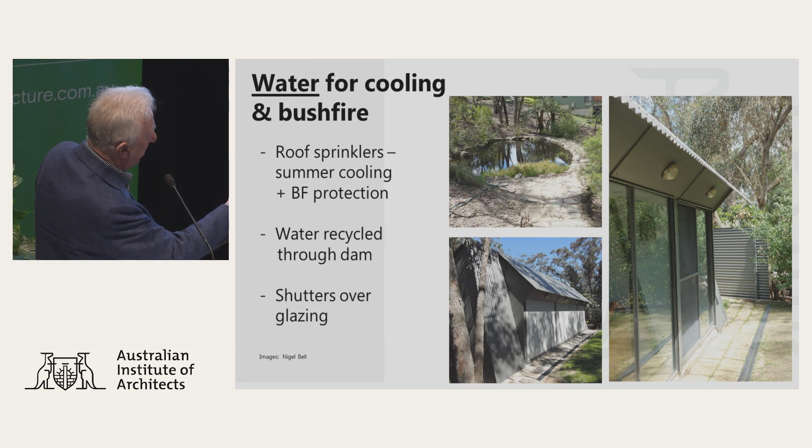Particularly if you design your building so that there's minimal eaves, no gutters, and you have the gutters at ground level, let me see if I can find one of those pictures. See, there's a gutter there at ground level, and across there. The eaves stick out so that you can get proper sun control, and there are also shutters in front of the main glass walls. Those shutters are down for this photograph, but let me see if I can find another shot.

That's a shot looking out from the shutters. You can see that it looks out onto a yard. Okay, so that gives you an idea of what I think a relatively fireproof building would be.

Just before the bushfires came to Mount Victoria and threatened us - they weren't very far away - I was prepared to stay there. I had additional sprinklers, like garden sprinklers, on some of the bushes nearby, but I was prepared to stay. I felt very confident that I would survive in that building, more so than some other buildings.

I just want to make a couple of comments about conventional buildings. Conventional roofs on conventional buildings are a recipe for disaster, I think, particularly if they're designed with timber framing, particularly if they're tiled roofs. Tiles harbour embers, and it's a great way for a fire to start. The other thing a lot of people don't realise is you get a lot of dust in a roof, and dust ignites, and that can set off a fire very, very quickly.

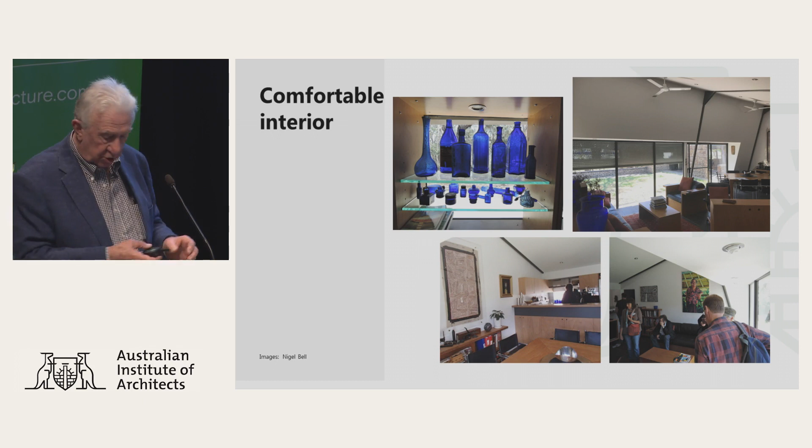Okay, go back 2 photos. You went through some of those quickly, I think. 2 photos? That's a challenge.

Okay, thank you, go one back. One more back. That one? Yes. Okay, oh yes.

Okay, all right, well thank you very much.